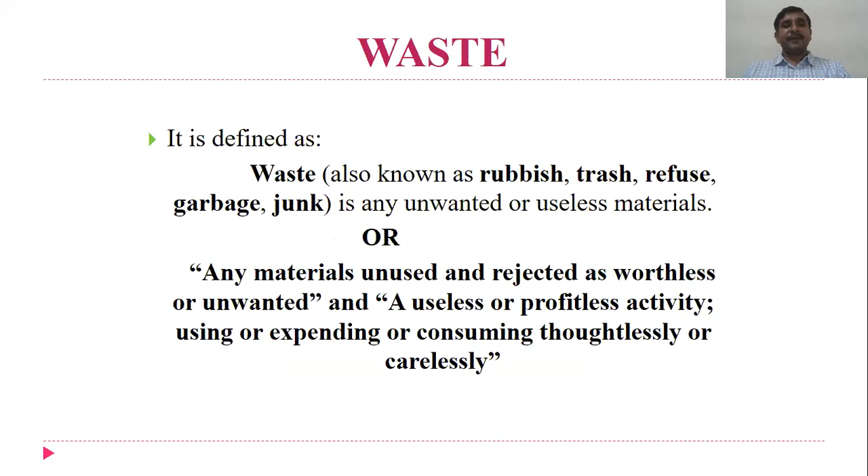Waste is defined as waste, also known as rubbish, trash, refuse, garbage, or junk - any unwanted or useless material, unused and rejected as worthless, or any useless, profitless activity using, expending, and consuming carelessly is called waste.

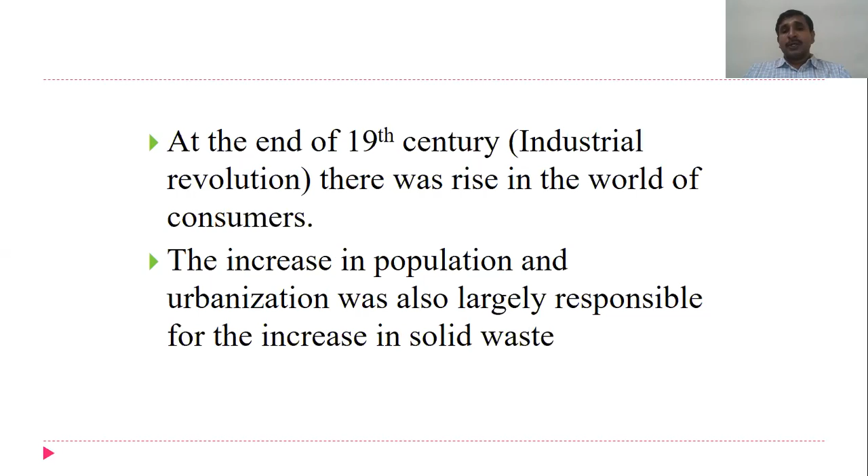At the end of the 19th century industrial revolution, there was a rise in the world of consumers. The increasing population and urbanization is also largely responsible for the increase of solid waste.

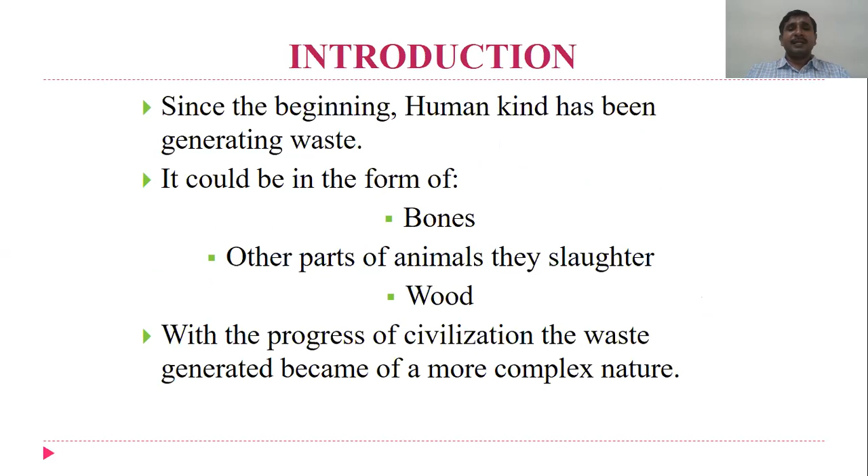In the introduction of solid waste, since the beginning humankind has been generating waste. It could be in the form of bones, other parts of slaughtered animals, or wood. With the progress of civilization, waste generated has become more and more complex in nature.

What is solid waste? Solid waste is defined as non-liquid, non-soluble material ranging from municipal garbage to industrial waste, containing complex and sometimes hazardous substances.

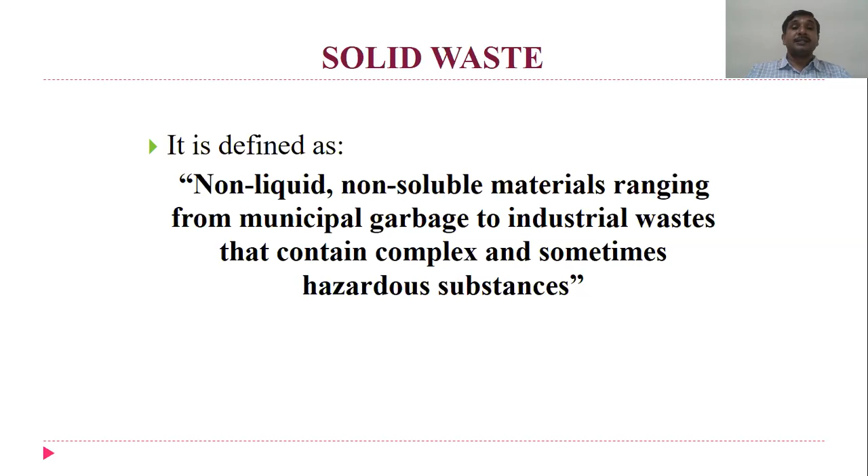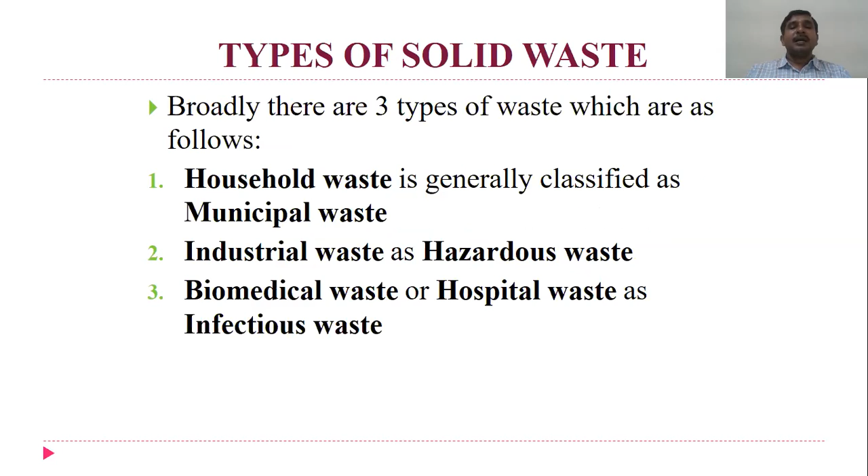Types of solid waste: broadly there are three types. They are household waste, generally classified as municipal waste; industrial waste, classified as hazardous waste; and biomedical waste, classified as hospital waste or infectious waste.

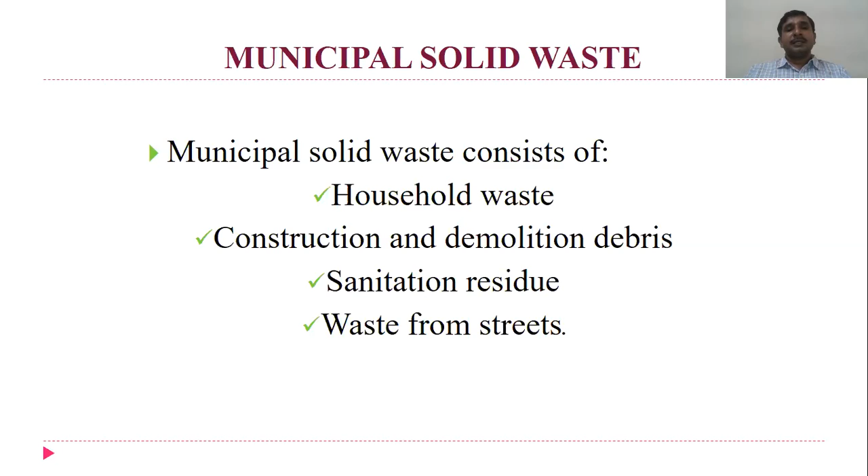Municipal waste: municipal solid waste consists of household waste, construction and demolition debris, sanitation residue, and waste from the streets.

The characterization of solid waste - they characterize the solid waste, or municipal solid waste.

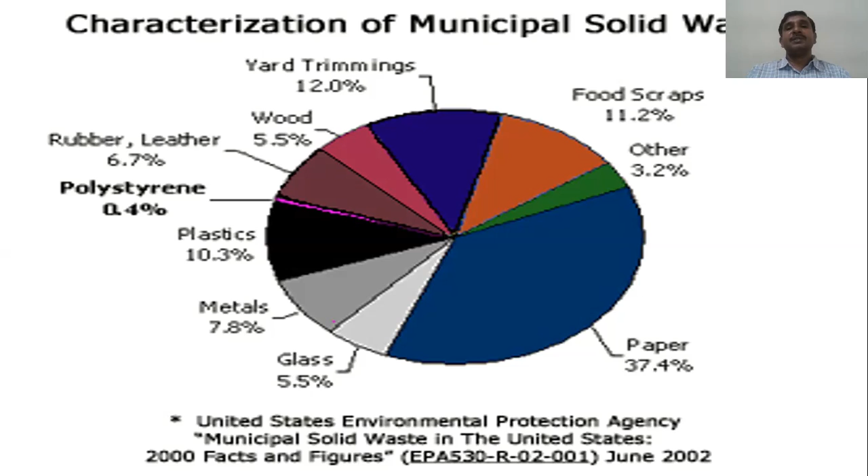Food and scrap is 11.2%, and paper is 37.4%. Glass is 5.5%. Metal is 7.8%. Plastic is 10.3%, and polystyrene is nearly 0.4%. Rubber and leather is 6.7%. Wood is 5.5%. Yard trimmings and agriculture waste is nearly 12% of the characterization of municipal solid waste present in cities.

With rising urbanization and changing lifestyles and food habits, the amount of municipal solid waste has been increasing rapidly, and its composition is also changing.

The existing landfills are neither well equipped nor well managed, nor properly lined to protect against contamination of the soil and groundwater system.

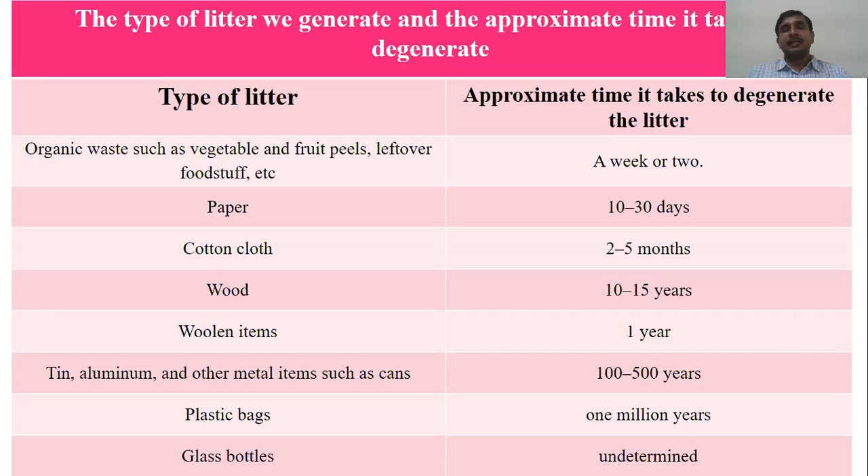Woolen items take 1 year. Aluminum and other metal items can take 100 to 500 years. Plastic bags take nearly 1 million years. Glass bottles are undetermined. These are the types of litter generated and the approximate time taken to degrade.

Hazardous waste is mainly industrial and hospital waste. It is considered hazardous because it contains toxic substances. Hazardous waste could be highly toxic to humans, animals, and plants. They can be corrosive, highly inflammable, and explosive, reacting when exposed to certain things - for example, gases.

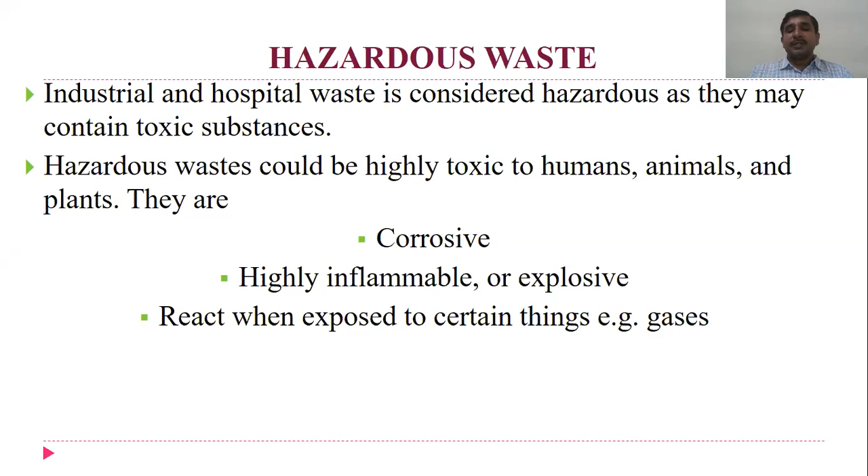Effect of solid waste - health hazards. If solid waste is not collected and allowed to accumulate, it may create unsanitary conditions, which may lead to epidemic outbreaks.

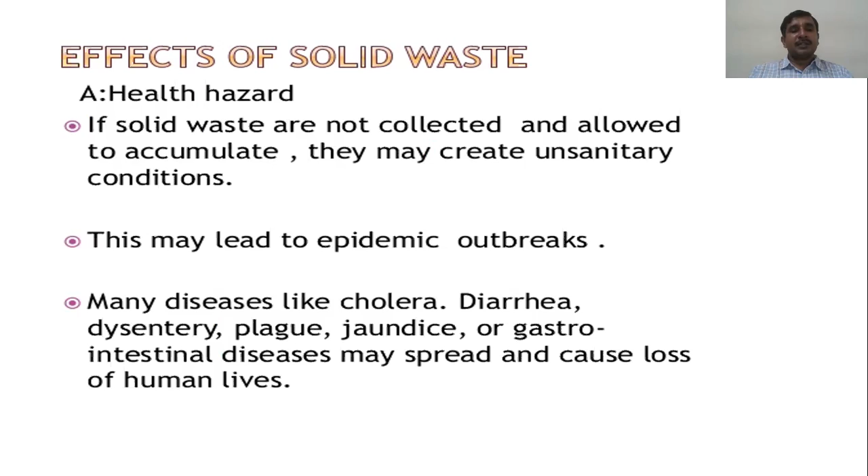Many diseases like cholera, diarrhea, dysentery, plague, jaundice, or gastrointestinal diseases may spread, causing loss of human lives. In addition, improper handling of solid waste is a health hazard for workers who come into direct contact with the waste.

Mainly environmental impact: if solid waste is not treated properly, decomposition or putrefaction - meaning decaying - takes place. Organic solid waste during decomposition may generate obnoxious, intolerable odor and gas released to the environment.

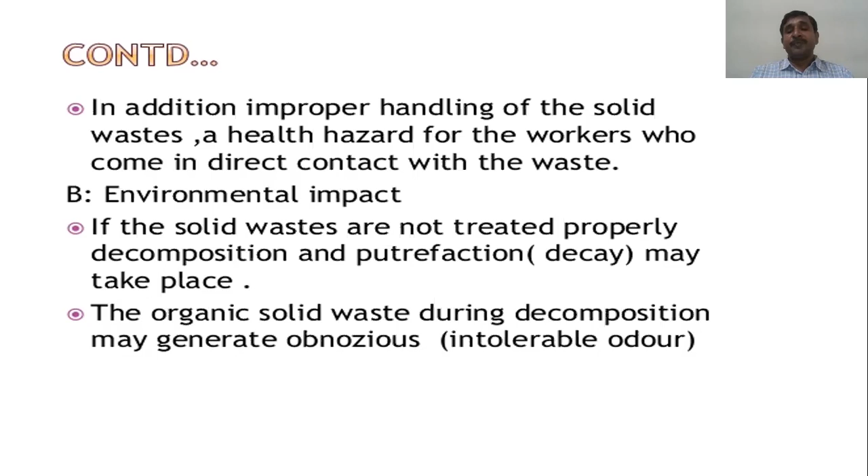Waste management concept: here is how to manage waste, with the concept of the 3 R's - reduce, reuse, recycle - to be followed for waste management.

What is reduce? The disposable goods like paper plates, paper bowls, napkins, towels - all waste materials like ceramics and plastics - these dishes should be recovered. One ton of paper can save nearly 17 trees. This is called reduce.

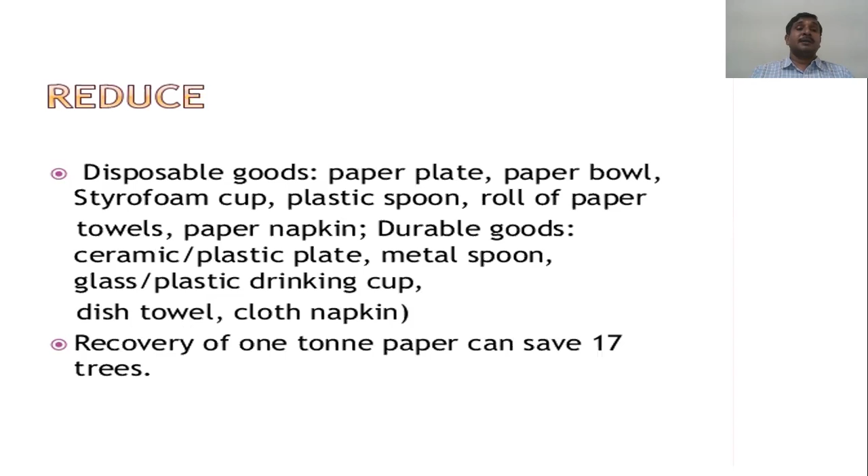Reuse: instead of buying a new container from the market, use the ones that are in the house. Don't throw away soft drink cans or bottles - cover them with homemade paper or paint on them, and use them as pencil stands or similar.

That is called the reuse. Recycle: use shopping bags made of cloth or jute, which can be used over and over. That is the recycle.

Waste management hierarchy. There are a number of concepts about waste management, whose usage varies between countries and regions. Some of the most widely used concepts include the waste hierarchy. The waste hierarchy refers to the 3 R's: reduce, reuse, recycle, which classify waste management strategies according to their desirability in terms of waste minimization. The waste hierarchy remains the cornerstone of most waste minimization strategies.

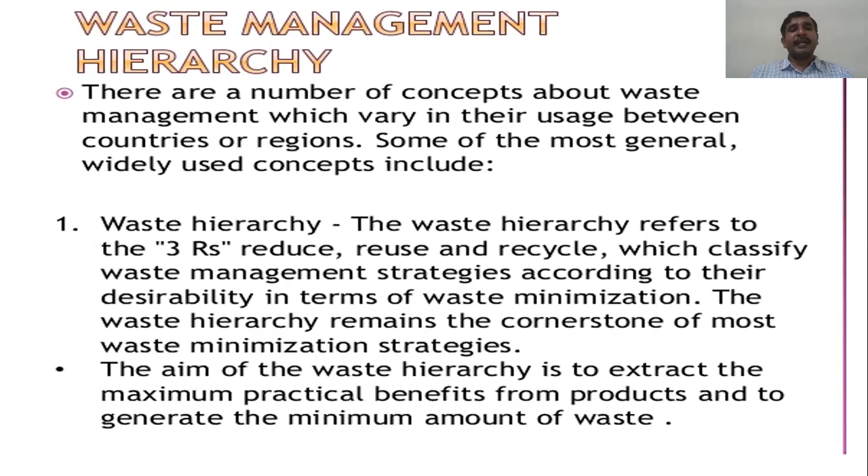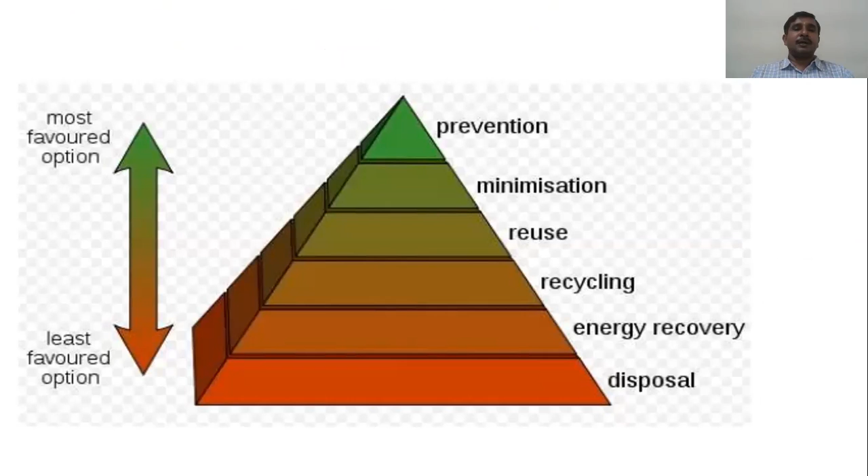The aim of the waste hierarchy is to extract the maximum practical benefit from the product and to generate the minimum amount of waste. From the most favored option to the least favored option: prevention, minimization, reuse, recycle, energy recovery, and disposal. This is how solid waste is managed.

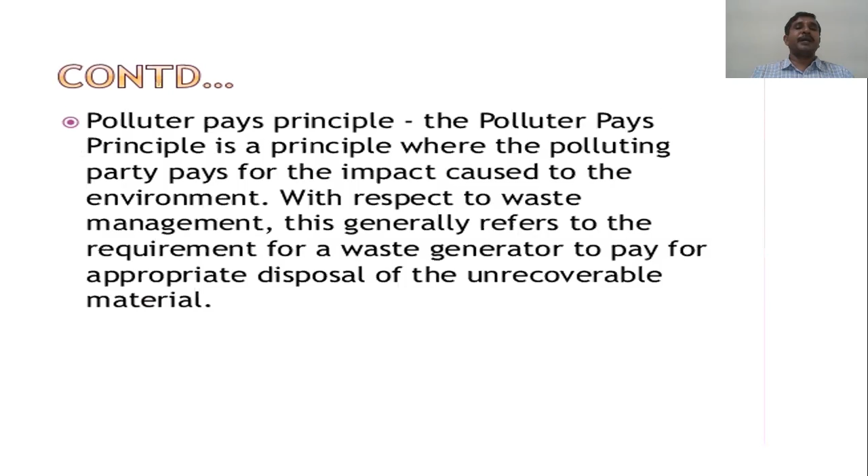The polluter pays principle is the principle in which polluting parties pay for the impact caused to the environment with respect to waste management. It generally refers to the requirement for the waste generator to pay for the appropriate disposal of the unrecoverable material.

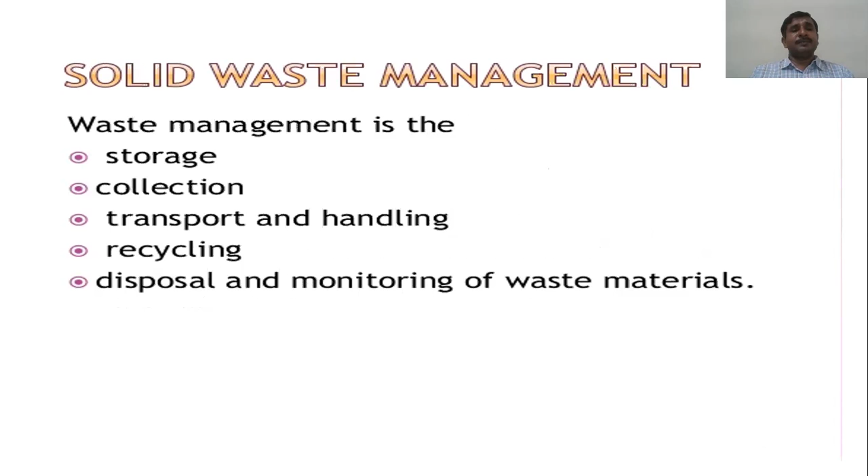Solid waste management. How is solid waste managed? Solid waste is managed by storage, collection, transport and handling, recycling, disposal and monitoring of the waste material. Storage: the waste material is stored in galvanized steel dustbins, paper sacks and public bins. Collection: house to house collection, collection from public bins, and collection and recycling of the material.

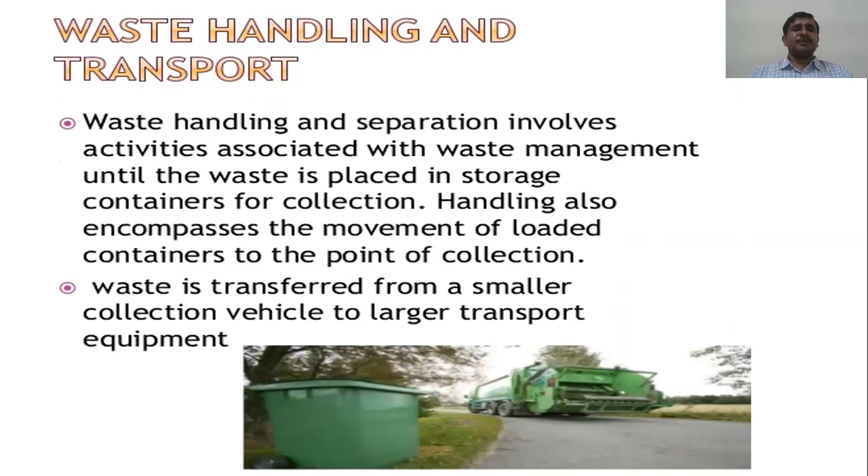Waste handling and transport. Waste handling and separation involves activities associated with waste management until the waste is placed in the storage container for collection. Handling also encompasses the movement of loaded containers to the point of collection, and the waste transport from smaller collection vehicles to larger transport equipment.

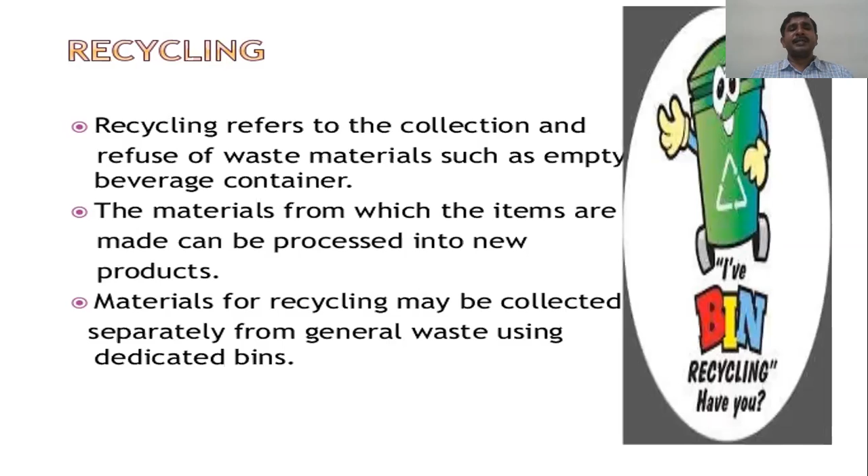Recycling. Recycling refers to the collection and reuse of waste materials such as empty beverage containers; the material from which items are made can be processed into new products. Material for recycling may be collected separately from general waste using dedicated bins.

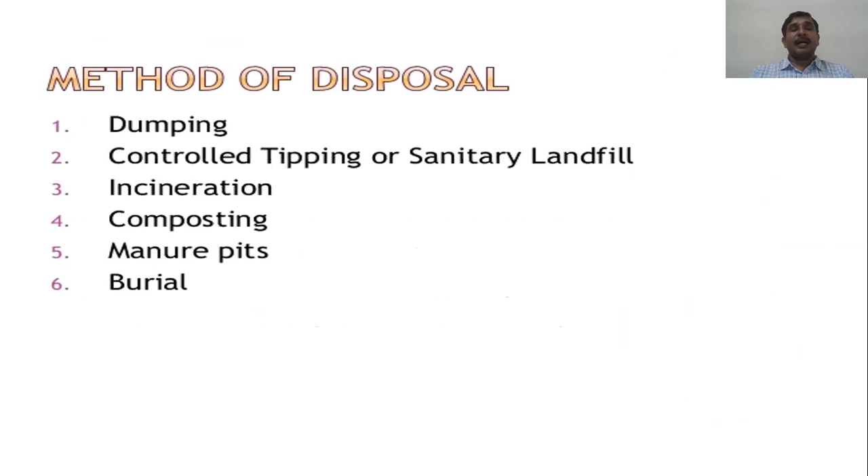Methods of disposal: dumping method, controlled tipping or sanitary landfill, incineration method, composting method, manure pits, and burial. Dumping: low-lying areas are used to dump the waste, mainly for dry refuse. In Kolkata, waste is disposed of by this method and the reclaimed land is given for cultivation. It is an unsanitary method: waste is exposed to flies and rodents, causes nuisance, is dispersed by wind, and pollutes surface water.

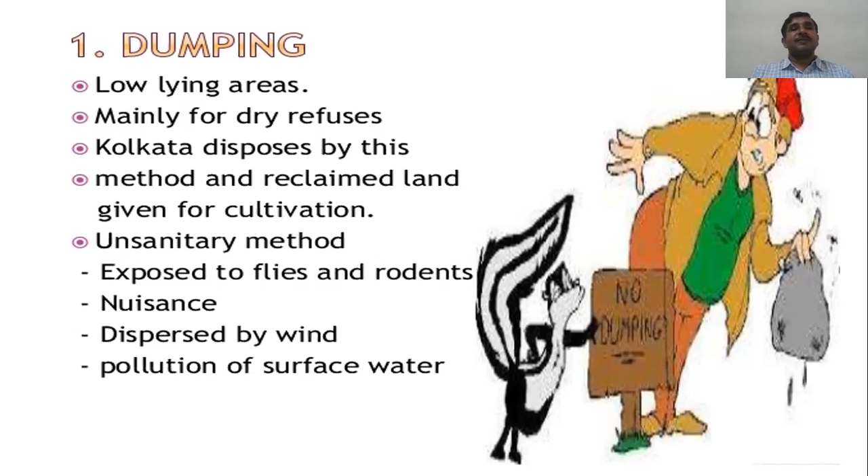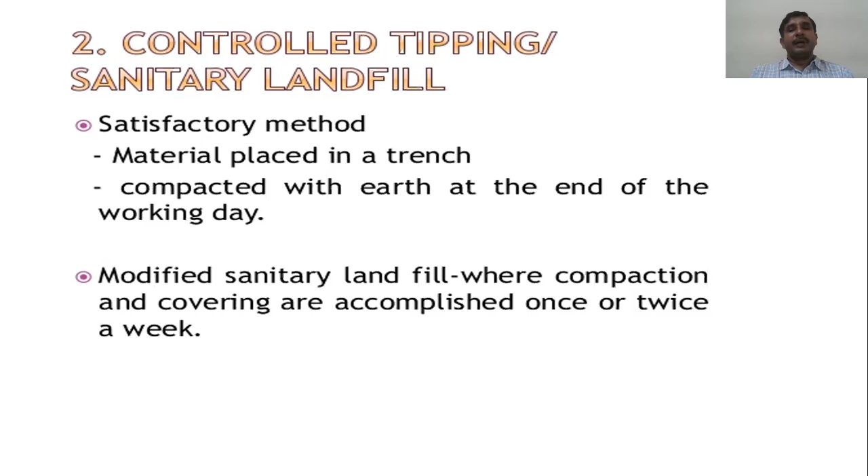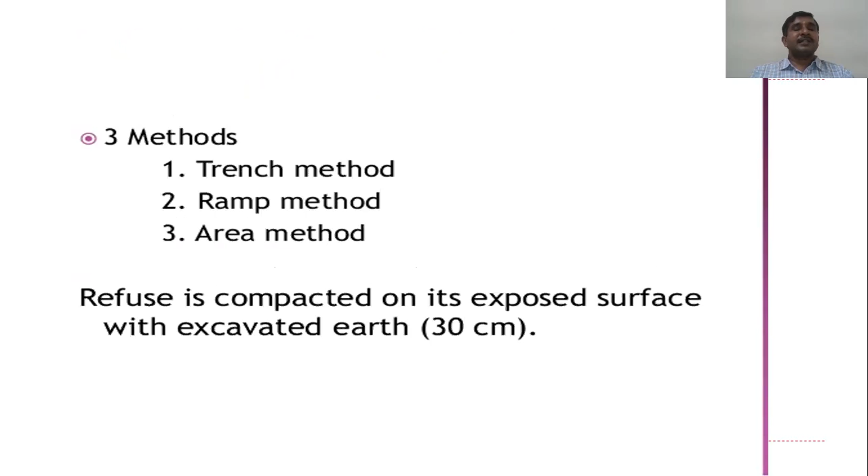Controlled tipping or sanitary landfill is a satisfactory method. Material is placed in a trench and compacted with earth at the end of the working day. In modified sanitary landfill, compaction and covering are accomplished once or twice a week. There are 3 methods: trench method, ramp method and area method. Refuse is compacted and its exposed surface covered with excavated earth nearly 30 centimeters deep.

Trench method: a long trench 6 to 10 feet deep and 12 to 36 feet wide; refuse is compacted and covered with the excavated earth. Refuse is filled up to 6 feet. It is estimated that 1 acre of land is needed per year for nearly 10,000 population. The ramp method is suited where the terrain is moderately sloping.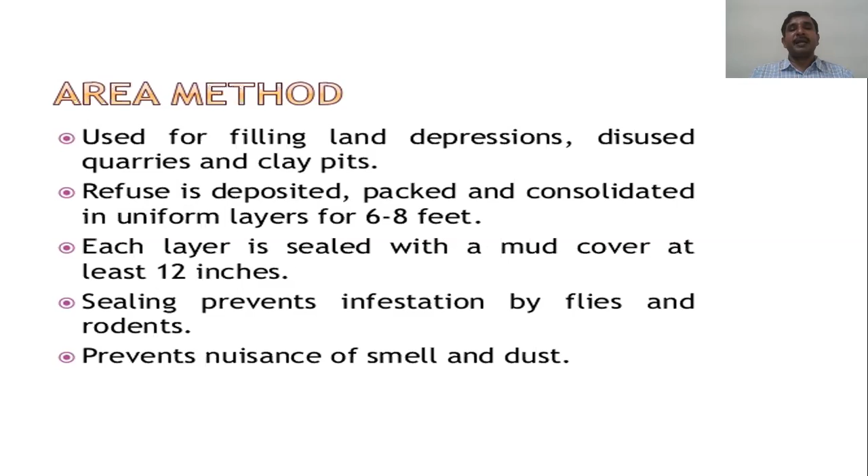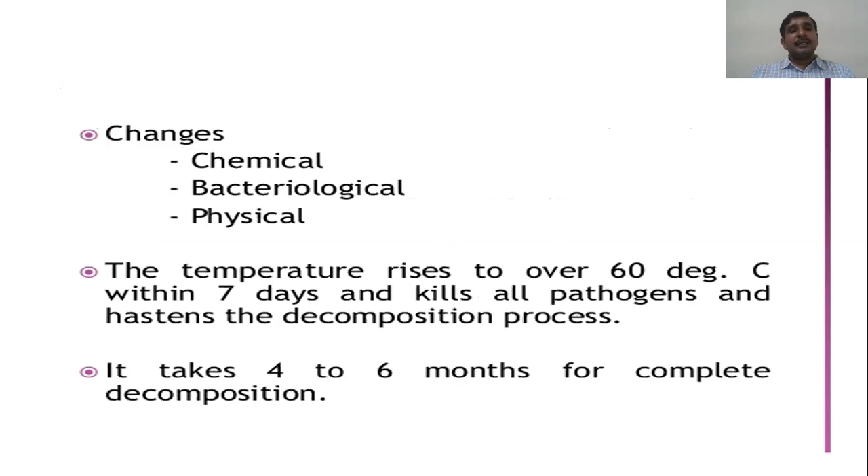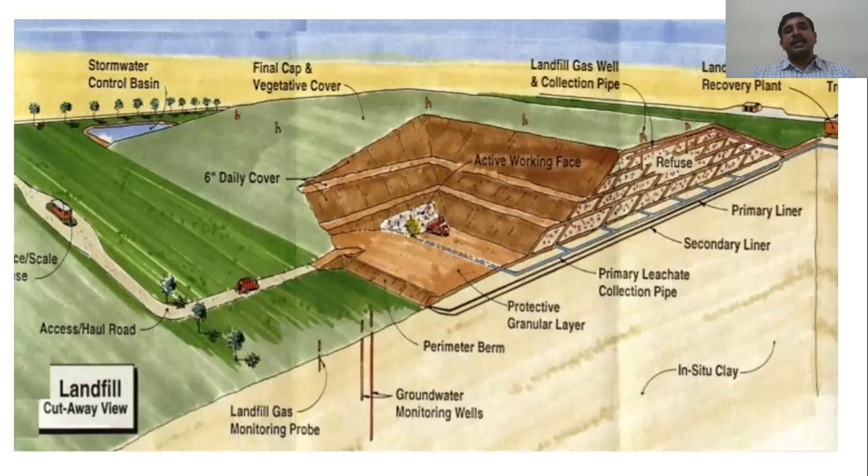The changes are chemical, bacteriological and physical. The temperature rises to 60 degrees within 7 days, which kills the pathogens, and hastens the decomposition process. It takes 4 to 6 months for complete decomposition. This is the pit method or landfilling method. Nearly 1 acre of land is taken, with a daily cover of 6 inches, for the active working face.

Incineration method. It is a disposal method in which solid organic waste is subjected to combustion so as to convert it into residue and gaseous products. This process reduces the volume of solid waste to 20 to 30% of the original volume. It is also described as thermal treatment, used where land is not available. Mostly this incineration method is used for hospital waste.

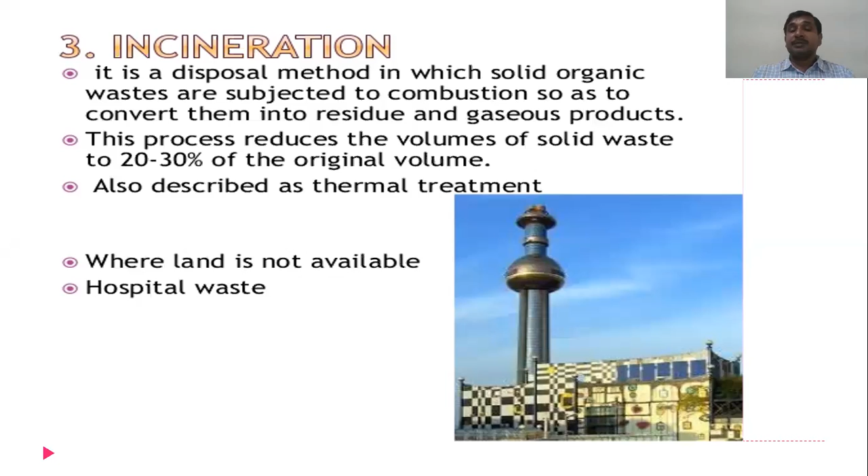The composting method is the combined disposal of refuse and night soil or sludge. The principal products are carbon dioxide, water and heat. The end product obtained in the composting method is compost.

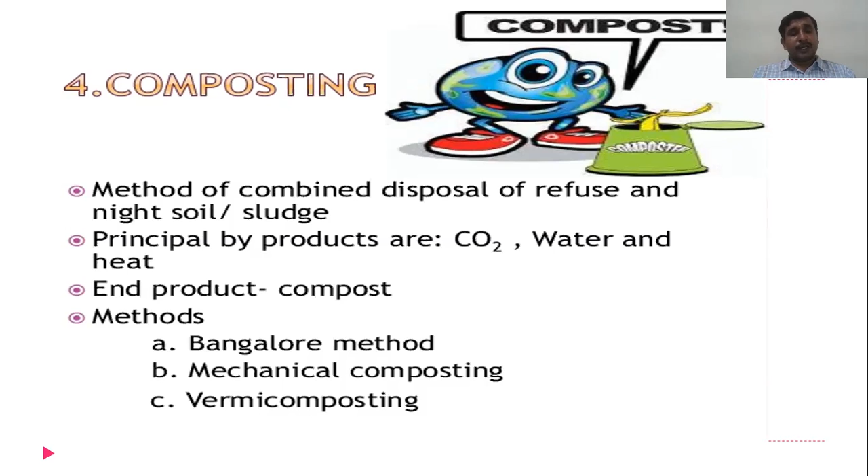In composting, there are three methods: the Bangalore method, the mechanical composting method and vermicomposting. The Bangalore method of composting is a hot fermentation process. It means it is the anaerobic method. The Indian Institute of Science and the Indian Council of Agricultural Research are operating this type of hot fermentation process. It is the anaerobic method.

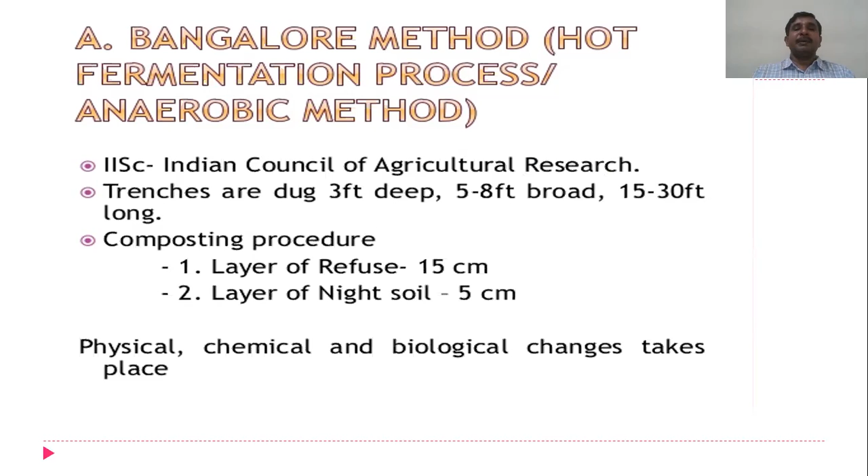The trenches are dug 3 feet deep, 5 to 8 feet broad and 15 to 30 feet long. In the composting procedure, refuse is laid layer by layer, nearly 15 centimeters, with a layer of night soil up to 5 centimeters. Physical, chemical and biological changes take place.

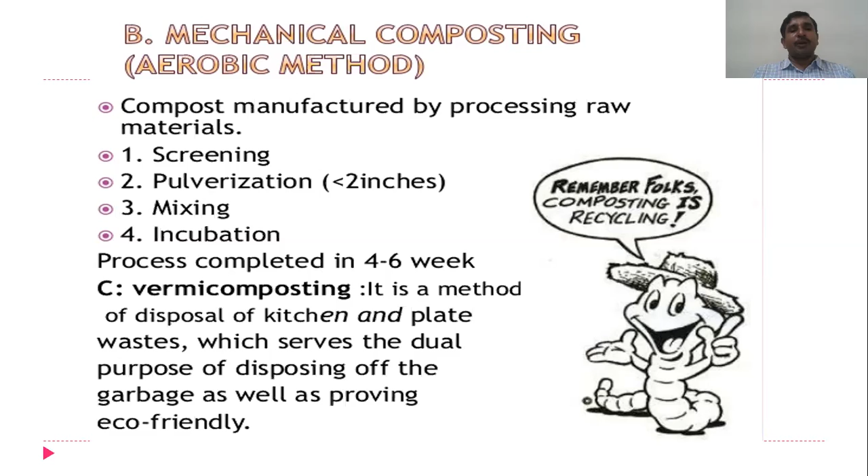Another method is mechanical composting. This is the aerobic method. Compost is manufactured by processing raw materials through screening, pulverization, mixing and incubation. It takes nearly 4 to 6 weeks for the compost to be prepared. The vermicomposting method is a method of disposal of kitchen and plate waste, which serves the purpose of disposing of the garbage as well as being eco-friendly.

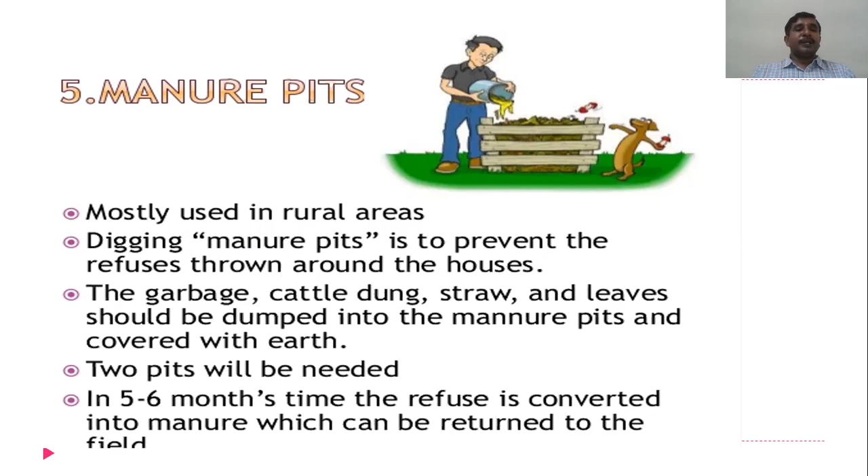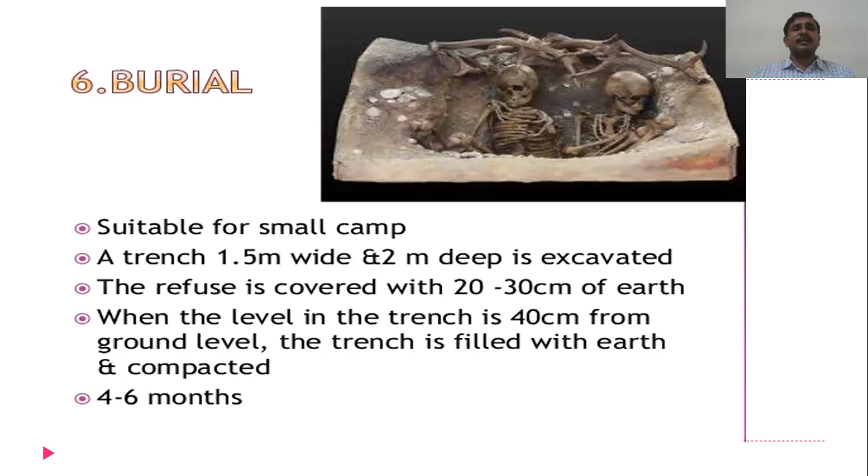The next method is the burial method. It is suitable for a small camp. A trench nearly 1.5 meters wide and 2 meters deep is excavated. The refuse is covered with 20 to 30 centimeters of earth. When the level in the trench is nearly 40 centimeters from ground level, the trench is filled with earth and compacted. This is the burial method. It takes 4 to 6 months.

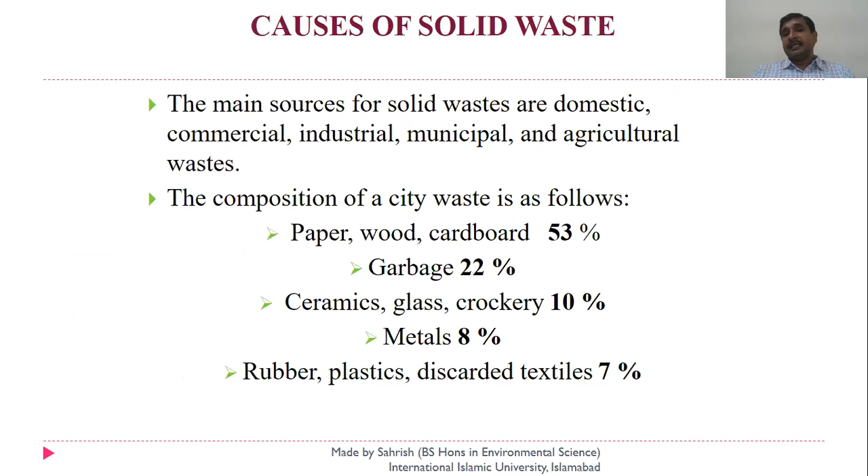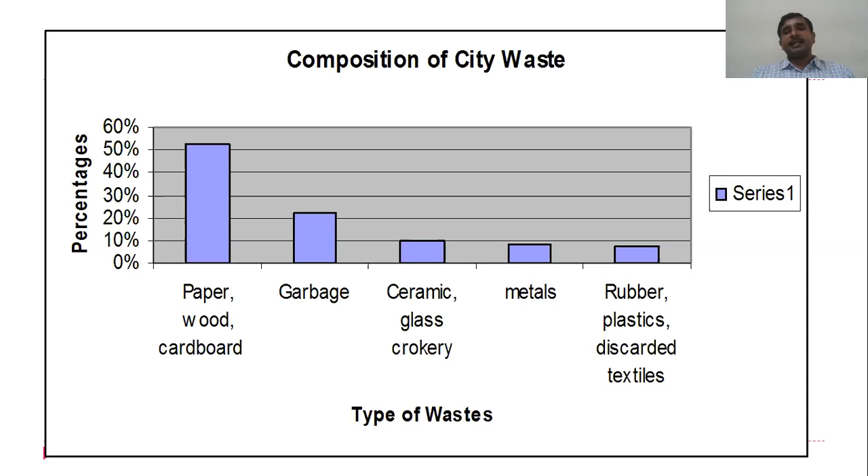Causes of solid waste. The main sources of solid waste are domestic, commercial, industrial, municipal and agricultural waste. The composition of city waste is as follows: paper, wood and cardboard nearly 50%, garbage 22%, ceramic, glassware and crockery nearly 10%, metals 8%, rubber, plastic and discarded textiles nearly 7%. These are the types of waste produced in the city.

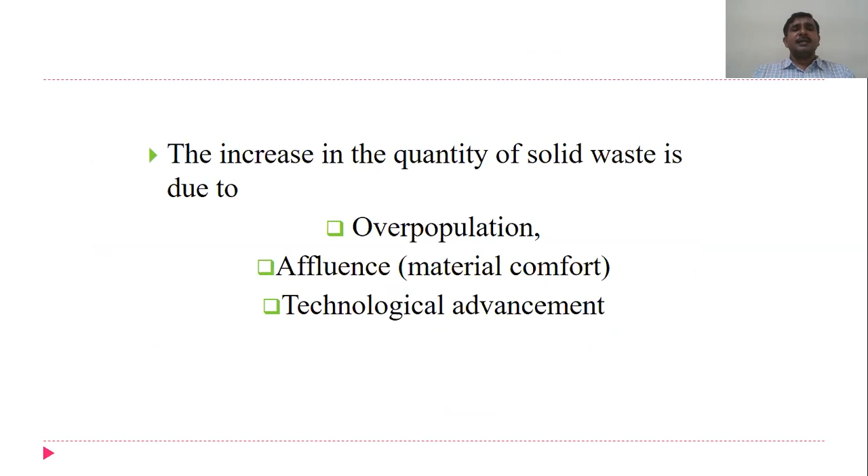The quantity of solid waste is increasing mainly due to overpopulation, material comfort, affluence and technological advancement. What is the effect of solid waste? Mainly, the health hazard. If solid waste is not collected and allowed to accumulate, it may create unsanitary conditions. This may lead to epidemic outbreaks. Many diseases like cholera, diarrhea, dysentery, plague, jaundice or gastrointestinal diseases may spread and cause loss of human lives. In addition, improper handling of solid waste is a health hazard for the workers who come in direct contact with the waste.

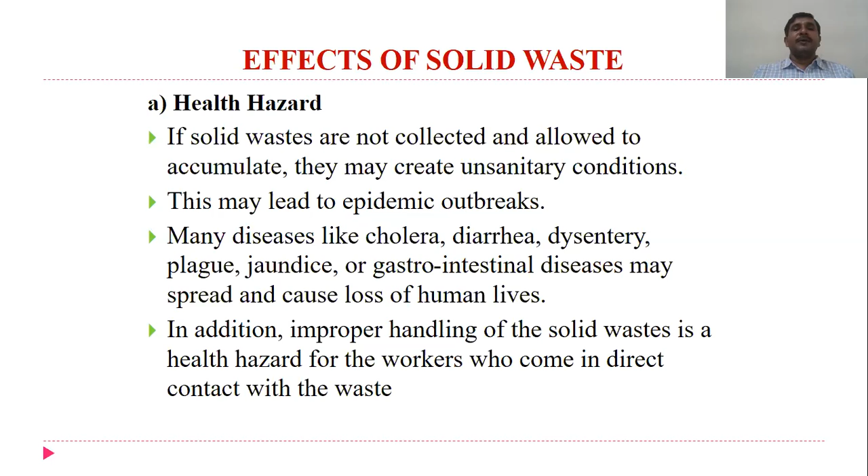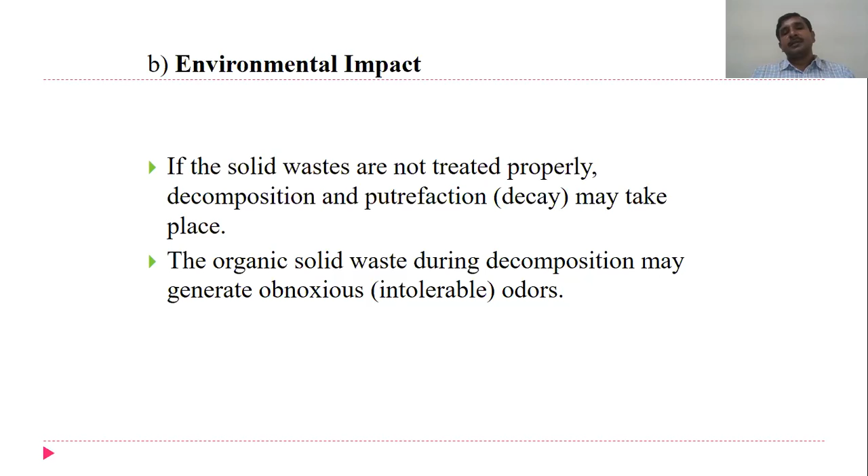Environmental impact. If solid waste is not treated properly, decomposition and putrefaction or decaying may take place. Organic solid waste during decomposition may generate intolerable odors.

The next is industrial waste. What is the definition of industrial waste? Industrial waste refers to the solid, liquid and gaseous emissions, residual and unwanted waste from an industrial operation. Examples: refineries, chemicals, pulp and paper industries, producing oil, grease, suspended solids, phenols, sulfides, ammonium nitrogen, acids and bases, and dioxins produced from the chlorine used in the bleaching process.

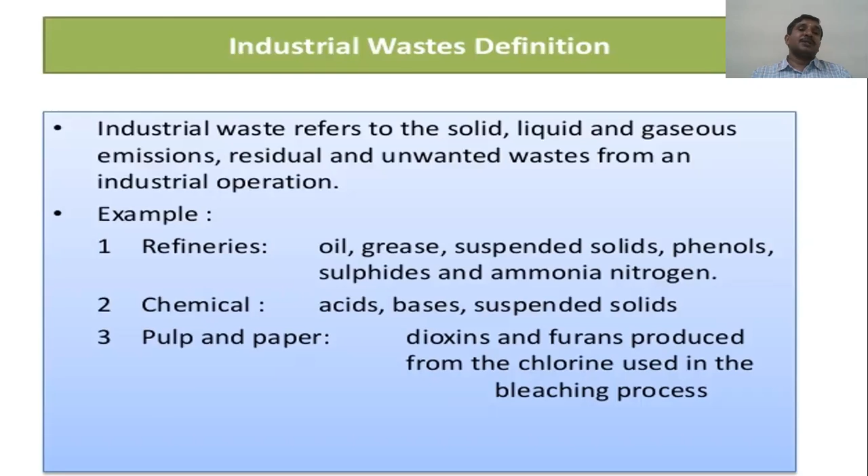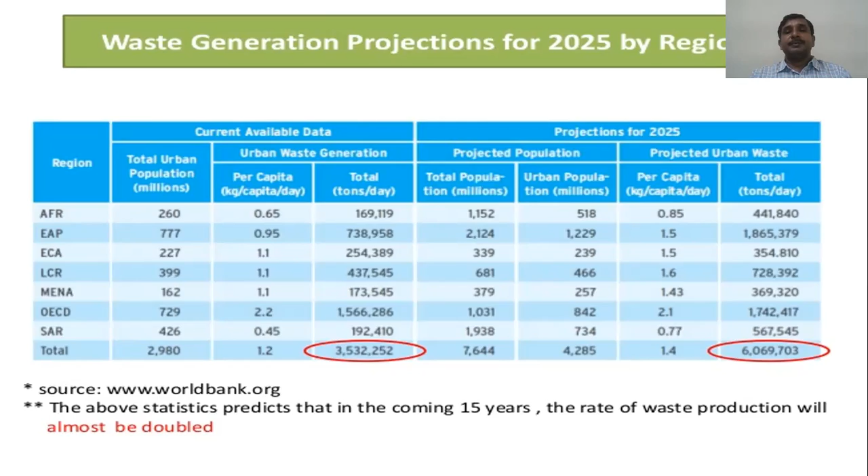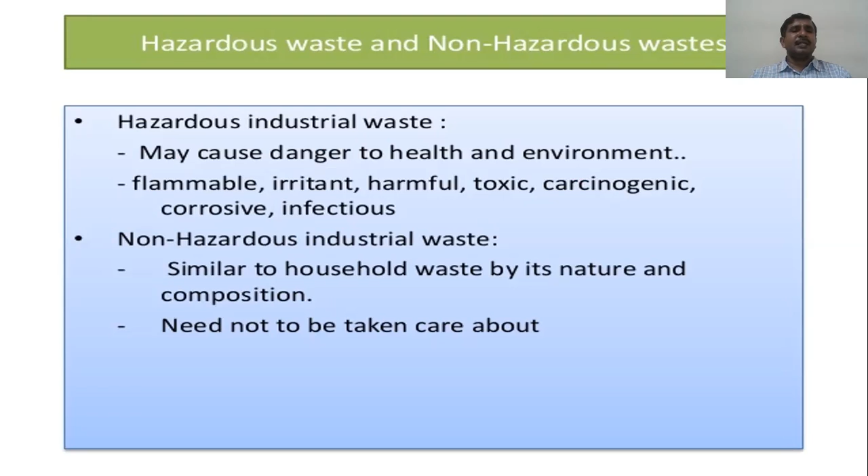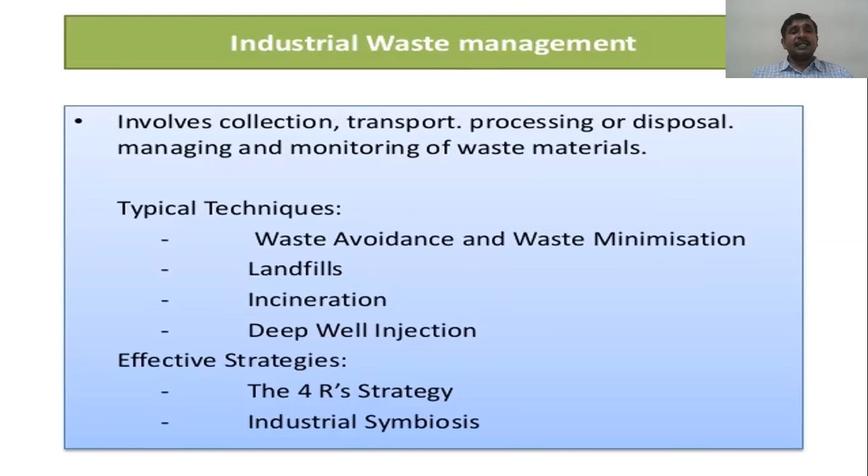Industrial waste management involves collection, transport, processing, disposal, managing and monitoring of the waste material. Typical techniques: waste avoidance, waste minimization, landfill, incineration, deep well injection. Effective strategies and the 4R strategy in industrial symbiosis. It seems to be a good idea, though not without risk, given the chance of leakage into the groundwater, to avoid the deep well injection method.

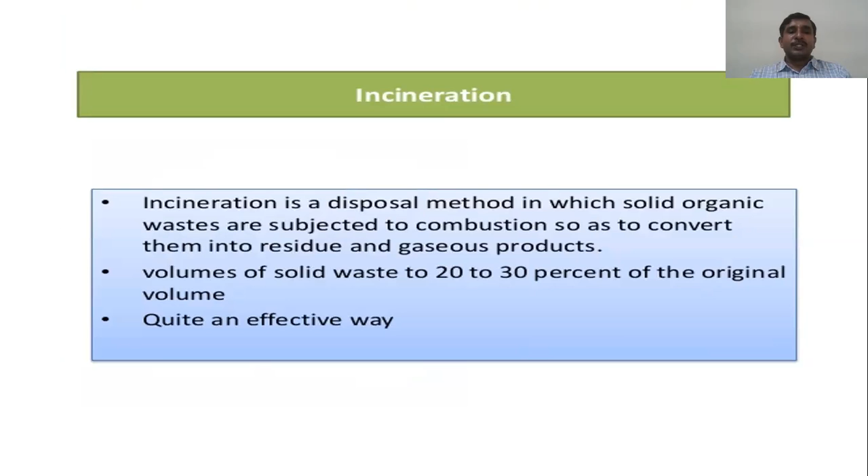Incineration is the disposal method in which solid organic wastes are subjected to combustion so as to convert them into residues and gaseous products. It reduces the volume of solid waste to nearly 20 to 30% of the original volume. It is quite an effective way. The 4R strategy: reduce, reuse, recycle, and recover in industrial waste management, with special emphasis on recovery.

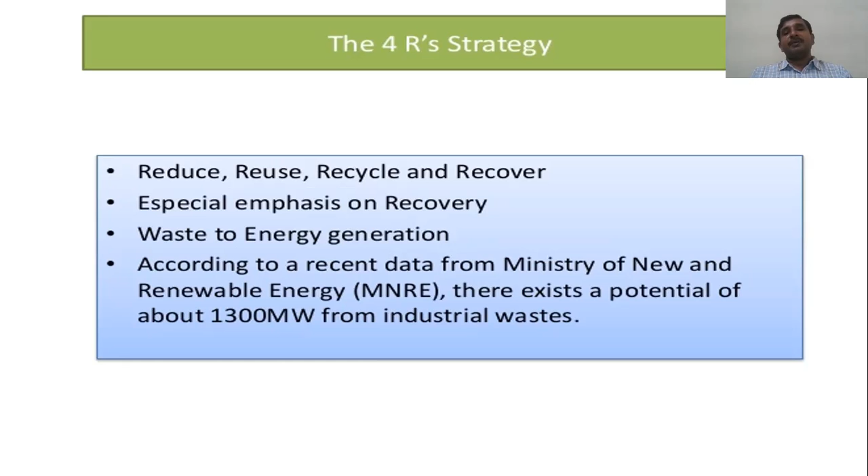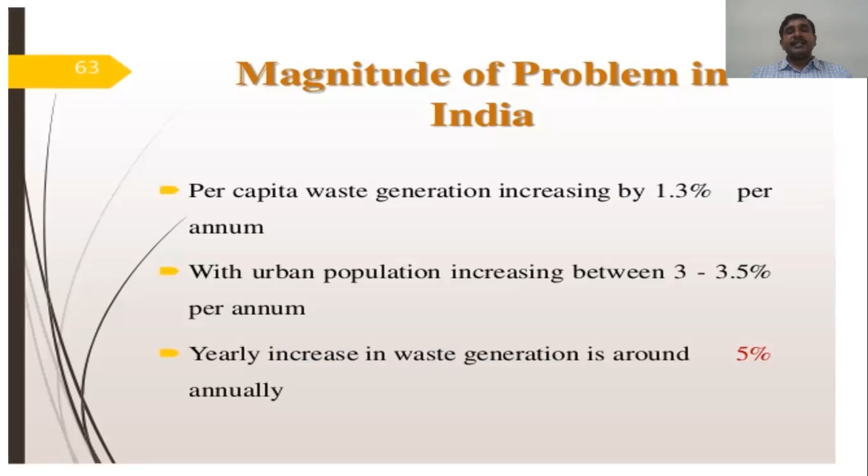Waste-to-energy generation. According to recent data from the Ministry of New and Renewable Energy, there exists a potential of nearly 1,300 megawatts from industrial waste. Magnitude of the problem in India. Per capita waste generation is increasing nearly 1.3% per annum, with the urban population increasing between 3 to 3.5% per annum. The yearly increase in waste generation is around 5% annually.

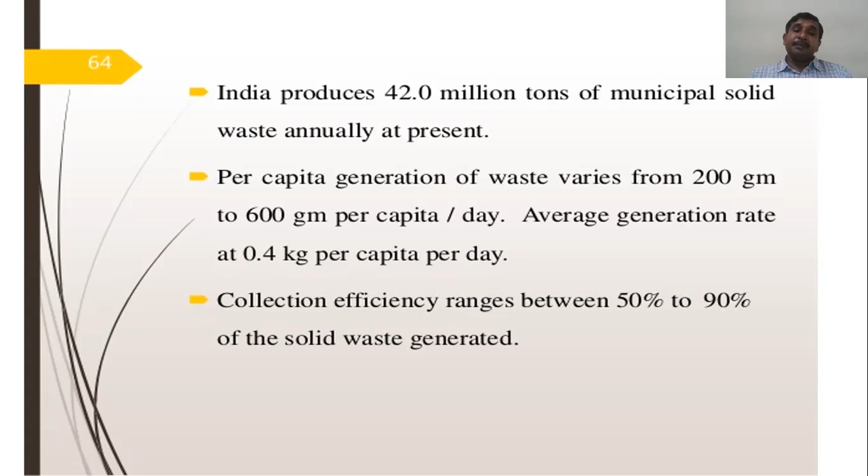India produces nearly 42 million tons of municipal waste annually at present. Per capita generation of waste varies from 200 grams to 600 grams per capita per day. The average generation rate is nearly 0.4 kg per capita per day of solid waste. The collection efficiency ranges between 50 to 90% of the solid waste generated.

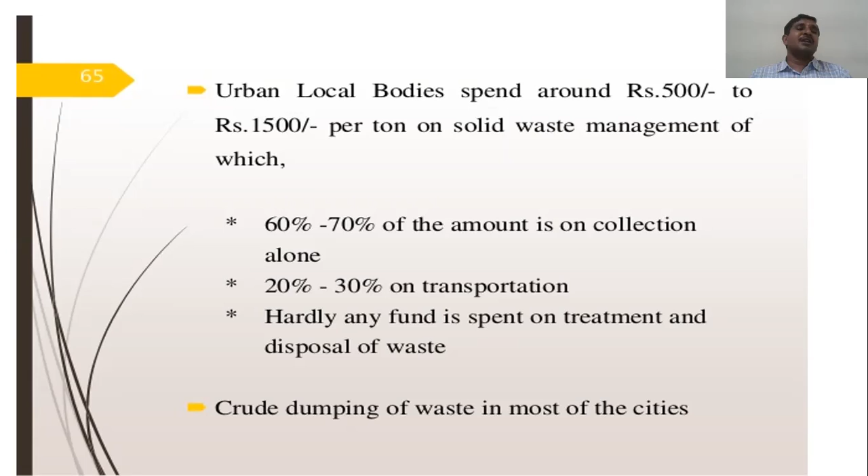Urban local bodies spend around 500 to 1,500 per ton on solid waste management, with nearly 60 to 70% of the amount on collection alone, 20% to 30% on transportation, and hardly any of the fund is spent on treatment and disposal of the waste. There is crude dumping of waste in most of the cities.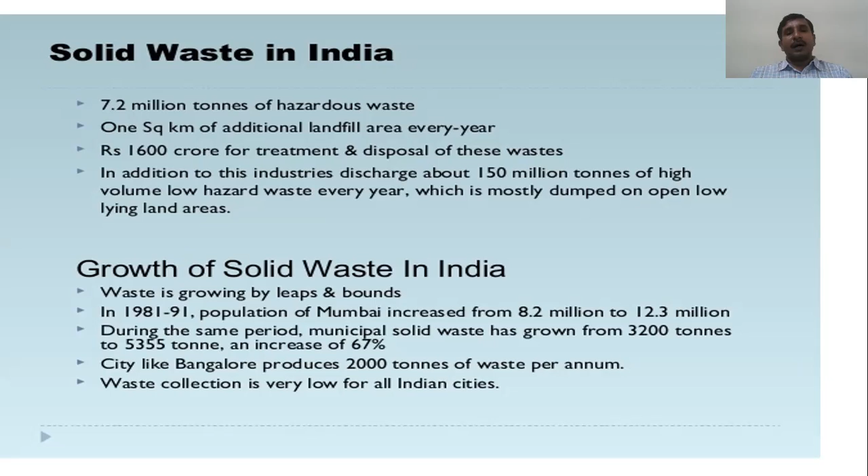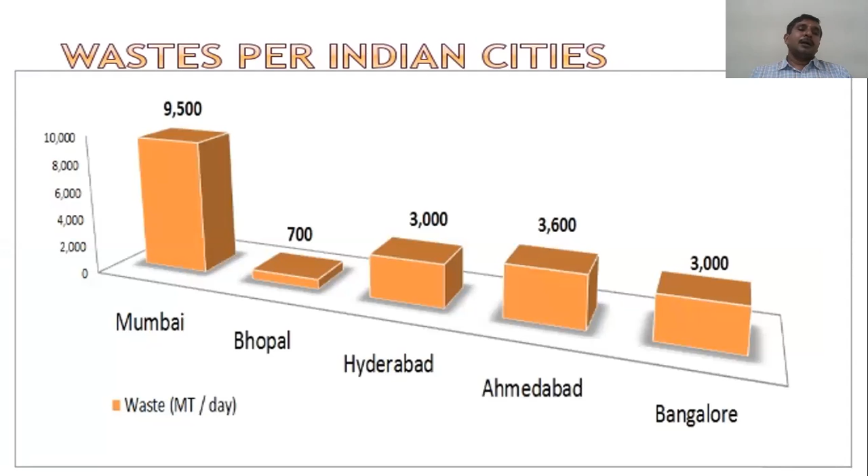Waste collection is very low for all Indian cities. The waste for Indian cities: Mumbai is 9,500 million tons, Bhopal is 700, Hyderabad is 3,000 million tons, Ahmedabad is 3,600 million tons, and Bangalore is nearly 3,000 million tons per day of waste produced in Indian cities.

Waste collection in India is primarily by the city municipality. There is no segregation of the waste produced, for example biodegradable, glass, plastics, papers, etc. These wastes are dumped on the city outskirts. Local raddiwalas or kabadiwalas collect small iron pieces with magnets, collect glass bottles, and collect papers for recycling.

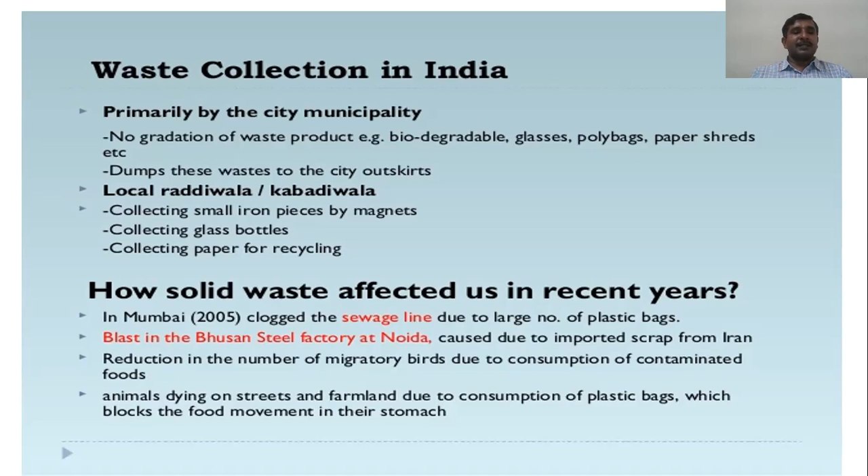How has solid waste affected us in recent years? In Mumbai in 2005, the sewage lines clogged due to the large number of plastic bags. The blast in the Bhushan steel factory at Noida was caused by imported scrap from Iran. There is a reduction in the number of migratory birds due to consumption of contaminated food. Animals are dying on streets and farmland from consuming plastic bags, which block the food movement in their stomachs. This is the municipal waste generation from the metropolitan cities in India, in million tons per day.

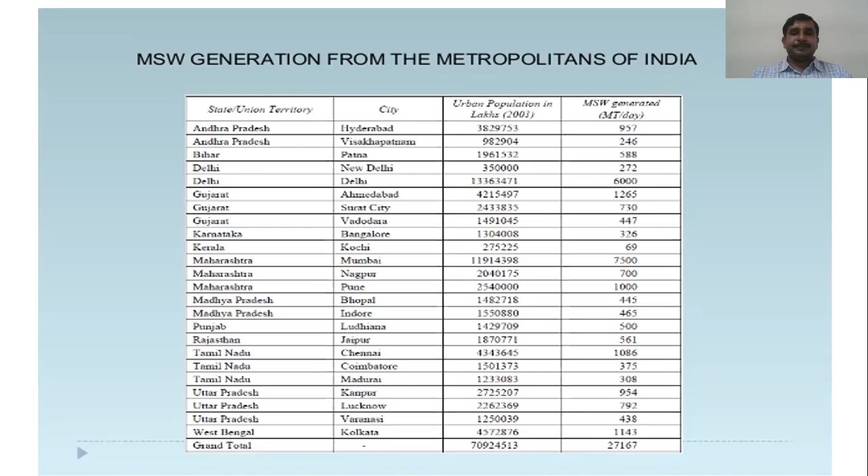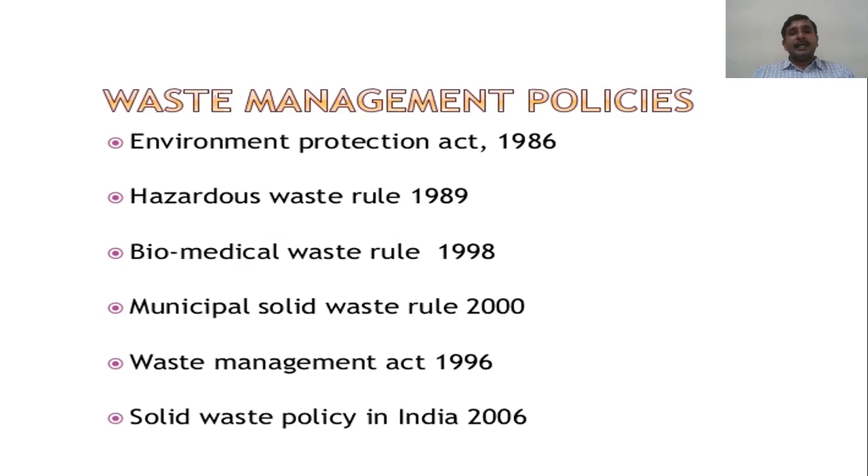The waste management policies: Environmental Protection Act in 1986, hazardous waste rules in 1989, the biomedical waste rules in 1998, the municipal solid waste rules in 2000, the Waste Management Act in 1996, and solid waste management in India in 2006. This is the brief of the references on solid waste management and urban waste.